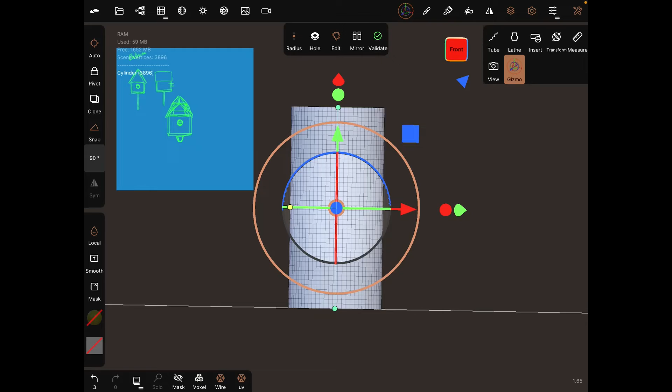For this Nomad Sculpt modeling video, we're gonna do a simple birdhouse. Let's get started. Let's delete our sphere, add a cylinder, and make it smaller. That'll be the base. So that's good. Then we're gonna need the bottom.

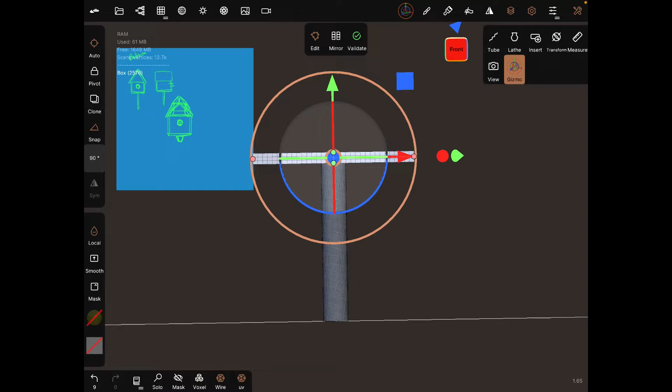Let's see, add a box. Front. Go up just a bit. Oh, that's good, that's good. We'll make it like 2. Start there, validate. Okay, now we're gonna make the walls.

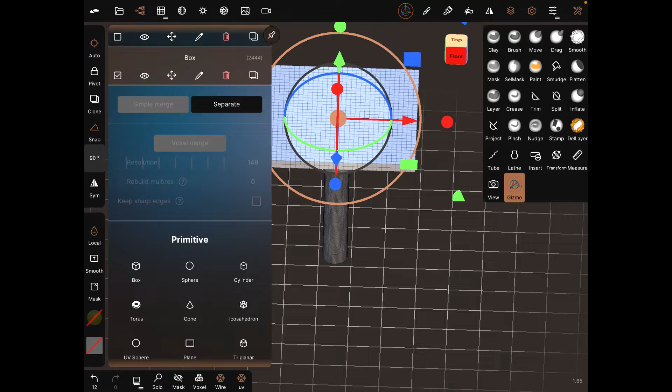So it's literally just these 4 walls, this, 4, 1, 2, 3, 4, 4 times over. So we're gonna do that. Duplicate, make a snap 90. Okay, front. Then duplicate.

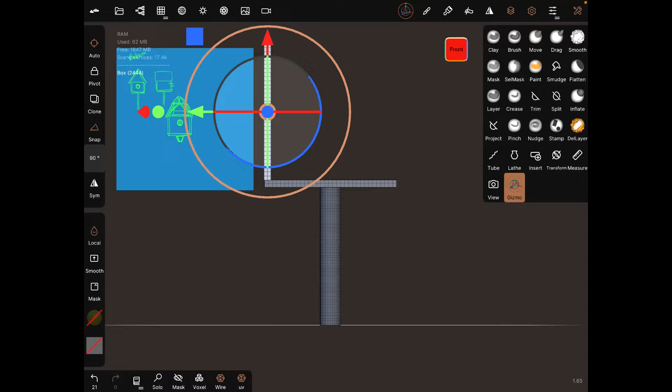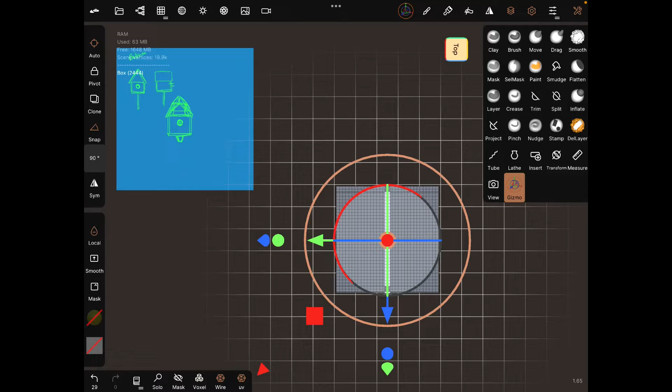Let's duplicate that. Let's go to the top view. That's not too bad. Okay.

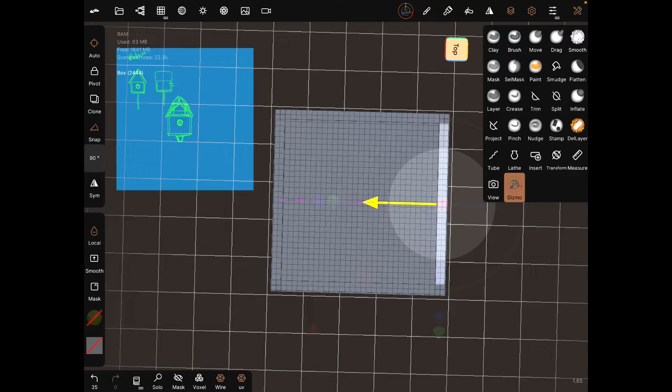Let's make it go in there. Okay, that's pretty much perfect. And then we're gonna duplicate that again. Sweet. All right, we got a little square. Let's actually make this a little bigger, so it seems more proportional.

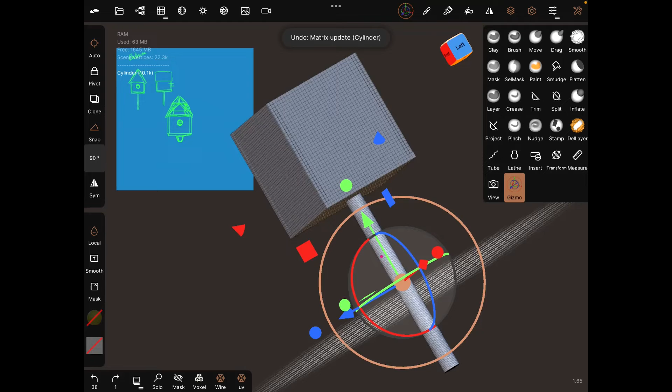Left, back, front. So for the front, remember we have a little square, a little circle here. So we do a trim ellipse for this. That's not bad. Okay, and then what we can do is add little squares.

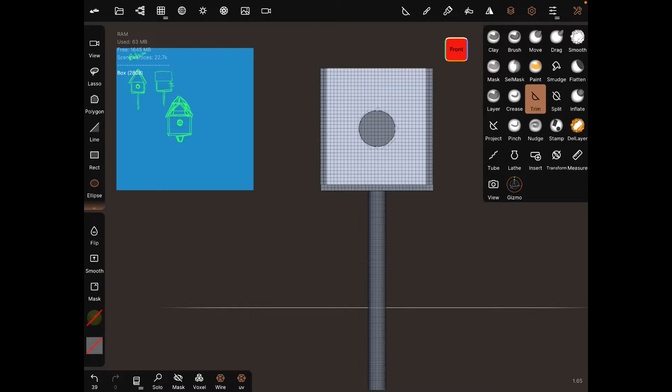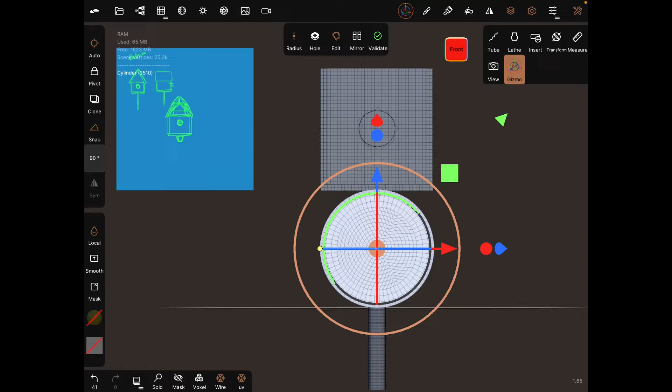Let's add like a torus, okay, cylinder, right, this way. Oh, this will be the birdhouse. Remember in previous videos, you can do a lot of mirroring, so you don't have to copy and paste this. But I'm just doing the manual way to show you. Circle, then that'll be the little house here.

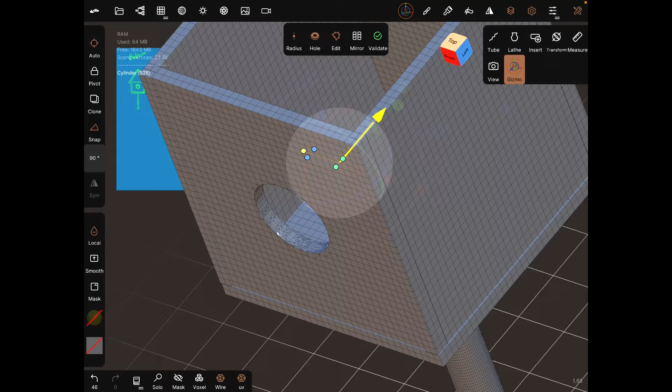Okay, expand this. Make this go a little smaller. Then put it right around here. Expand it a little bit, both ways. Okay, it's not bad. And then apply. All right.

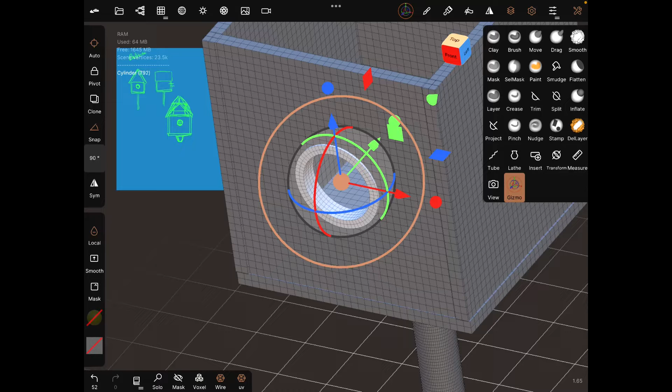And then we're gonna add the little window squares. So just add. Yeah, we can make a duplicate of this. So duplicate, make it way smaller.

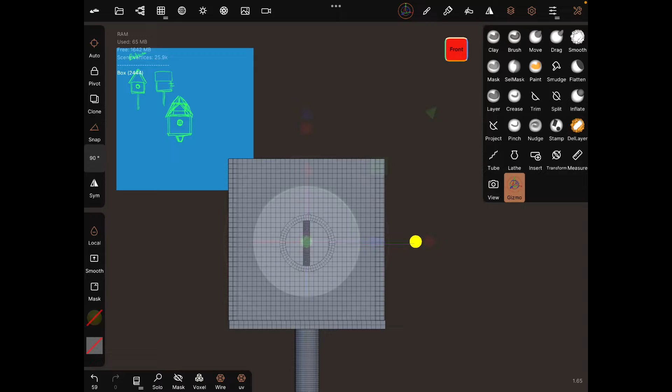Like this. Front. That, make it thin, thin, thin, thin. Cool. All right.

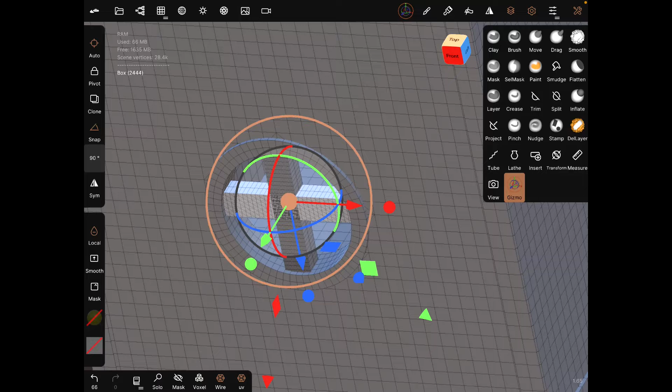Then duplicate that. Make it, yep, just like this. And then these two can be a simple merge. Actually, no, voxel merge. Oh yeah, that's nice. Okay, then we get our little cross here.

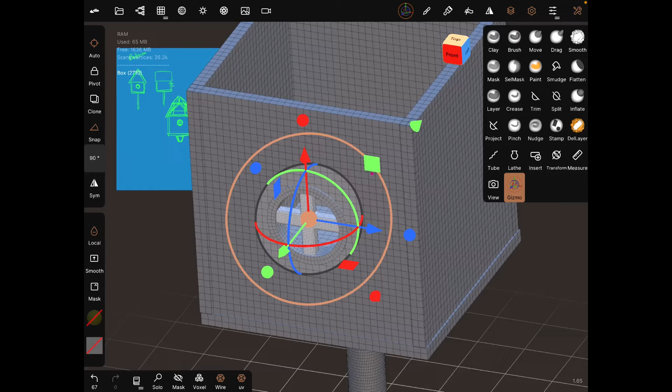And now we can do our birdhouse side panels right here. So what we can also do is just copy these two. So where is it? Duplicate it.

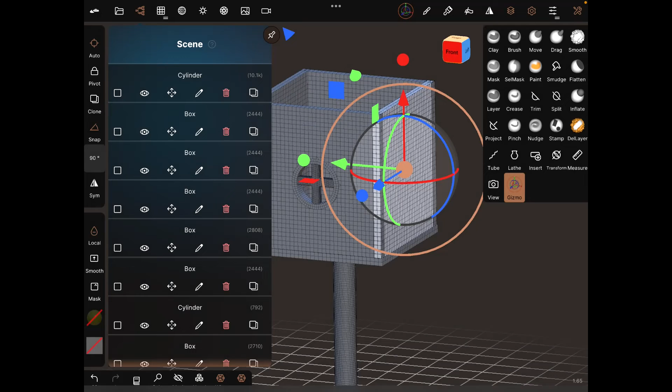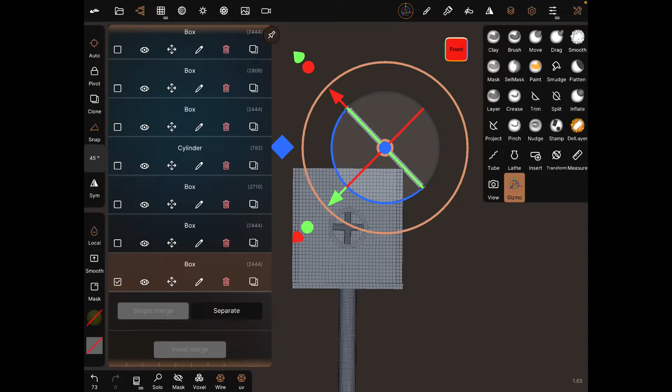Put it into a 45-degree snap. Okay, like that. Front. This. Then duplicate that. Right. And then just...

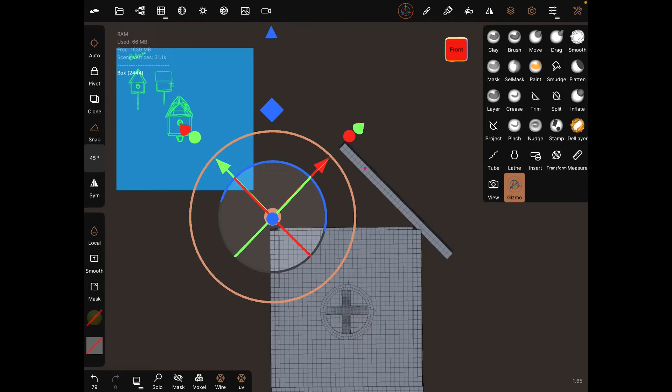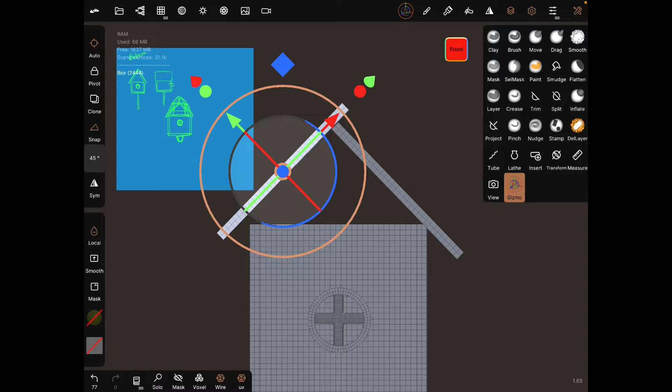Where's it? Oh, I am not sure what happened there, but all right. Front. Okay, and then we can merge those two. Voxel merge. Nice. All right.

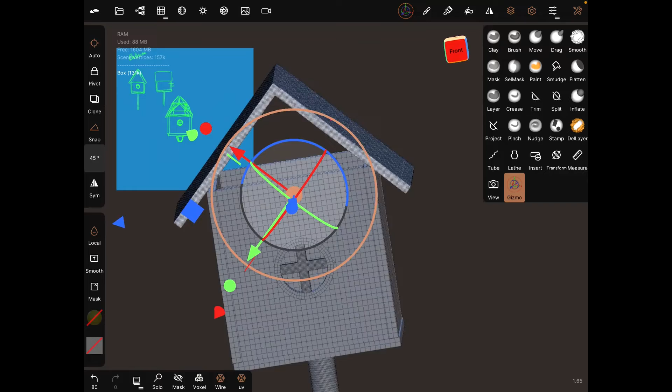Now we just need to fill in this triangular gap right here. I think... duplicate that. I'll make it go up.

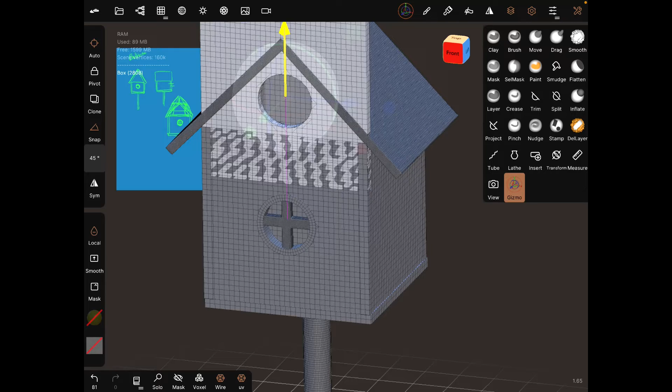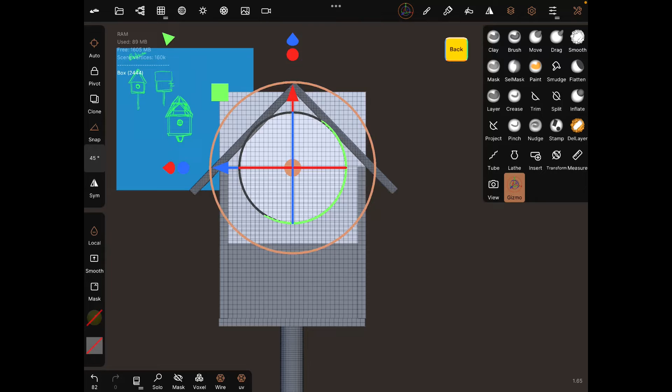Oh, actually, my bad. Yeah, don't do that. Do the one in the back. Duplicate that.

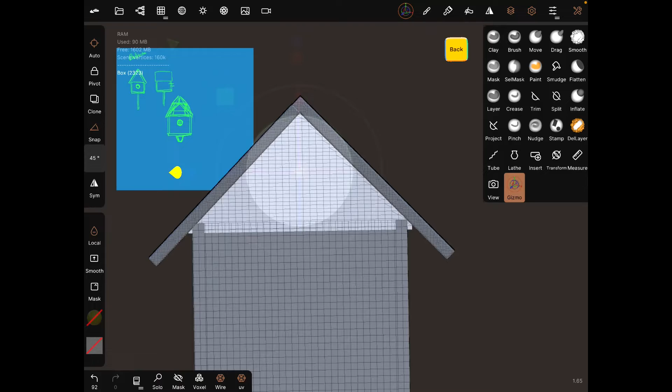All right, and this won't be too bad. So what we could easily do is just do a slice or a trim, and we can do a line. And then go to Gizmo. Oh, that's not too bad.

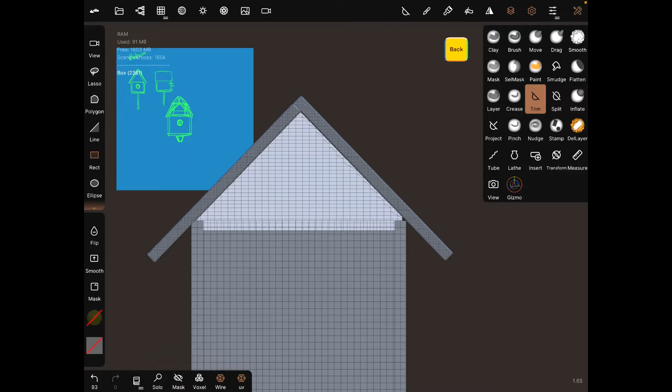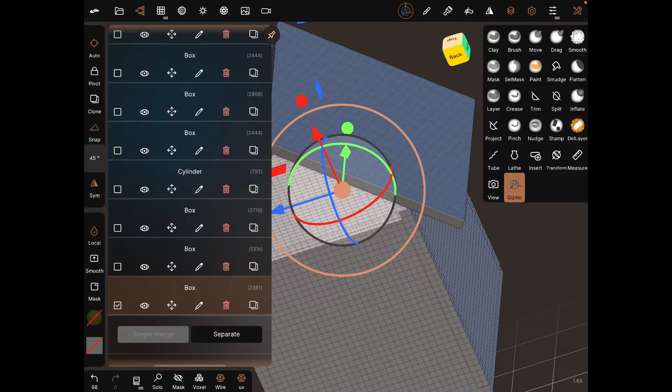Okay, back, and then do symmetry, no snap, go to trim, and go to rectangle. Okay, go back to Gizmo. Okay, that's good. And then duplicate that.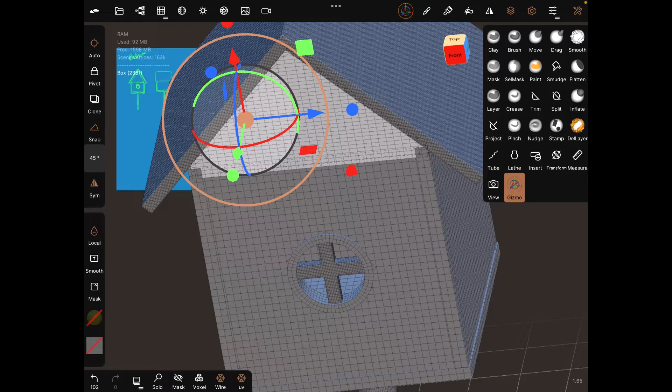Go to the front. This one is. All right, sweet. Okay, and there we have it. We have a little birdhouse.

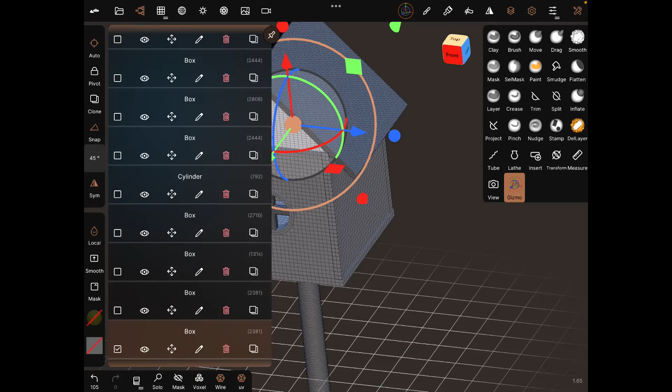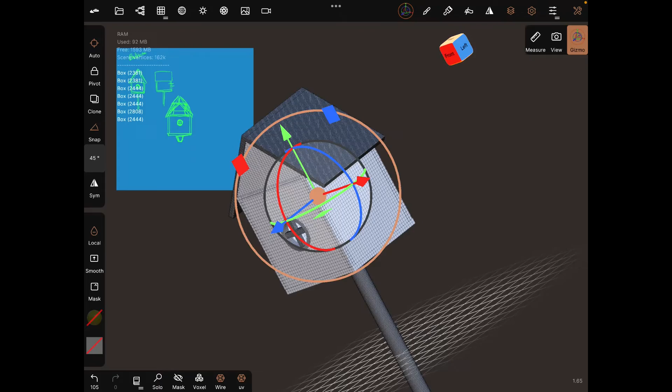We can also select these two. Let's see. Make that one big piece, so we'll do a voxel merge. All right, and that's good.

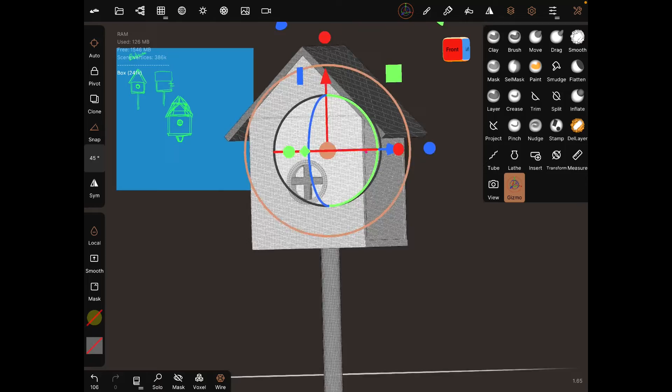Okay, now last thing, mat cap, nope, PBR, unlit, yeah, that doesn't look bad at all. Okay, and thank you for watching.

All right, we can do some painting, and then do some UV unwrap. If you want to stay, I'll do the UV unwrap so you have more practice with it. But otherwise, I'll put this up online so you can download it for your own use.

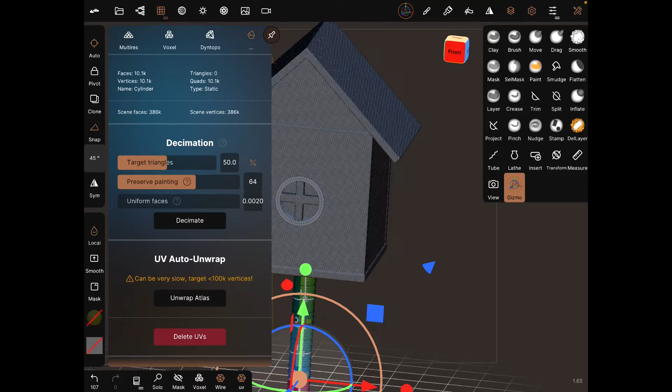Oh, that's done. Then okay, last, oh no, roof. That might take a little bit.

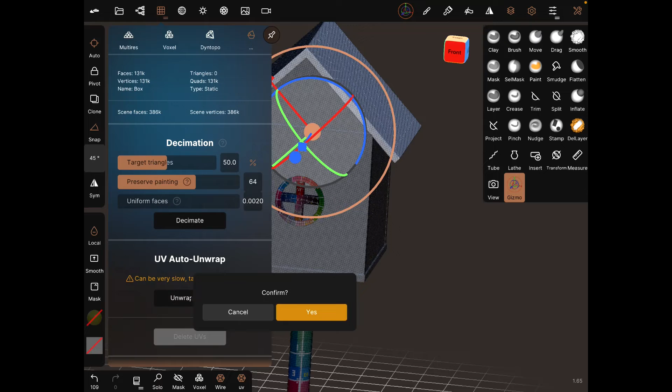Oh man, that is taking quite a bit. Didn't think it was gonna have that much. And there it is. All right, and the last part, that actually might take a while.

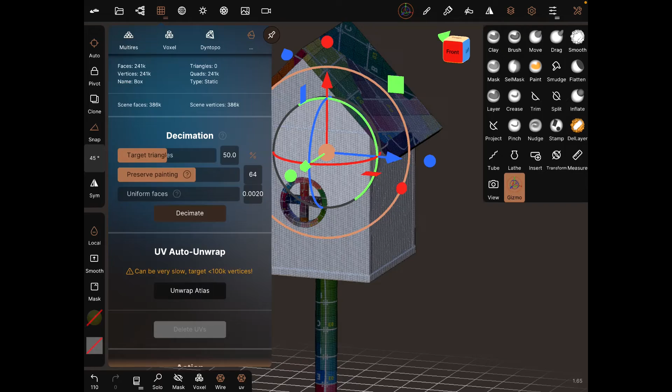Whew. Yeah, that is 300, oof, 241 vertices. Let's decimate. Oof. See how low we got that down. 240. Let's decimate some more. Decimate some more. All right.

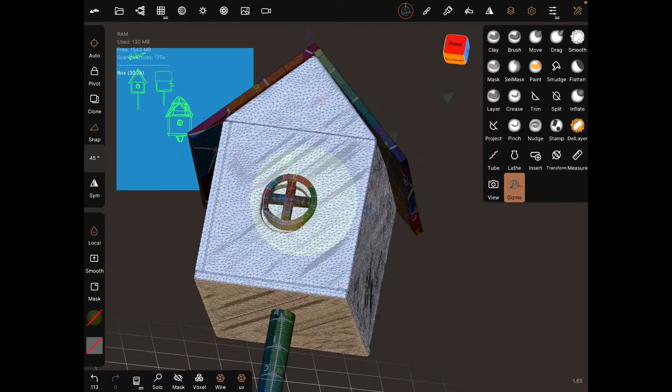Okay, it still gets the job done. All right. Yeah, it's pretty much flat, so that's not too bad. All right.

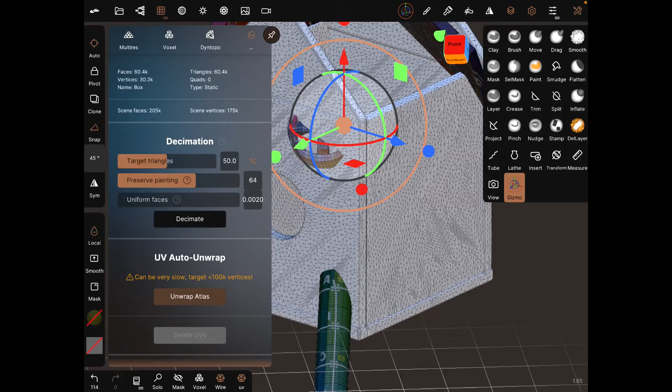And then UV unwrap. Remember, if you have something that's like 300K faces or vertices, it's always good to decimate so your model isn't too heavy.

Ooh, what happened here isn't right. Ah! Oh no, it broke. That's fine.

So front. Let's cancel the snap. Front. Let's do the side. Alright, that's not terrible. Let's do the back.

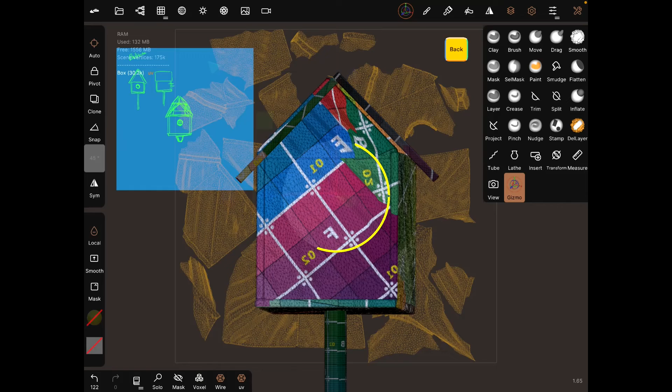There it is. Okay. Let's do the right. That's the front. All right.

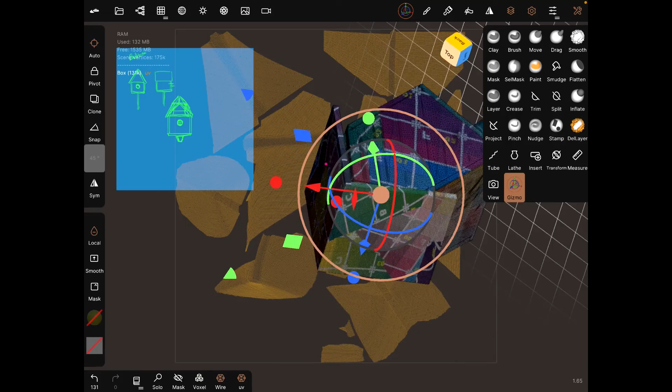Okay. That's not terrible. Wonder what I broke.

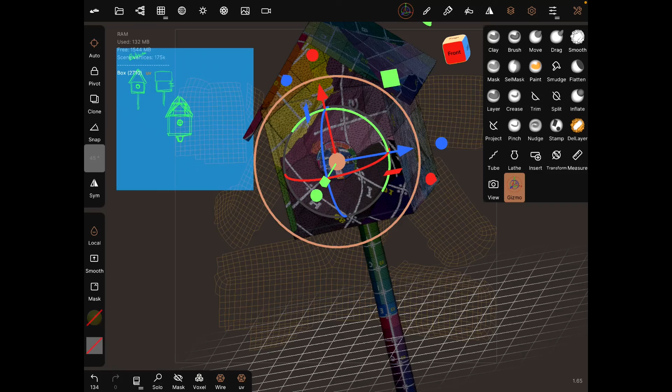I guess maybe that's some of the things you need to watch out for when you're decimating. Sometimes it'll break your model, or you'll break it without even knowing what you did.

No, that's good where it is. Oh, that's the other piece. All right. It's not terrible there. Okay, so the model's good now for some reason.